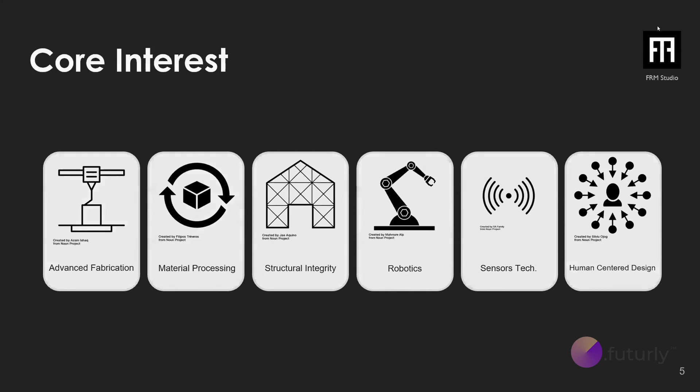A valid question at this point is, why did we come together, and what are we trying to do? So first, FRM Studio did analyze that there is a gap in the design to fabrication process. There is a gap in the design to production process. And this gap is basically a lot of designers fall behind when it comes to materializing and being able to actually visualize and see what their product would look like.

Another one that is important is Miami has an appetite for high-end products. There is a big art scene over here. And what we really wanted to do is to have a creative house in Miami that can do design to fabrication. Now, pushing this a notch further, we figured integrating sensor technology with fabrication is at the core of what we would like to do. And Miami does not have a one-stop shop, or it may, but it does not have that much competition that can execute from design, fabrication, and integrate technology into it.

Most important, which is the fourth point, is we wanted a space that is ours, where we can come in, we have our own machines, we have our own tools, we're designers. So we wanted to fuel our passion and interest to do proto-architecture.

So what do we plan on doing? We intend to design and produce architectural elements. Those are going to be fueled by science, advanced fabrication, and sensor technology. We want to build furniture products, building systems, that can be cladding systems, that can be, you name it, an art installation.

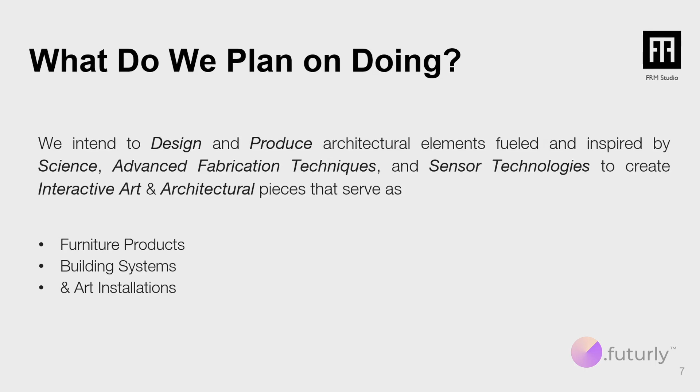So a valid question also at this point is, what is design versus design to fabrication? If someone approached me with this question, I'd say, if what you mean by design is solving functions and laying out a floor plan, yes, design to fabrication is totally different. I will be answering design to fabrication in the project that I'll be covering soon.

So what do we do, or how do we do it? Actually, not what do we do, how do we do it? This is really important. And those 7 points that I have over here, I'm going to be covering also in the project that I will be showing. But the first thing that we do when a client approaches us is we assess. Is this a good opportunity? Does it line up with our company's vision? How do we go about it?

And if we figure out that, yes, it does line up with the company vision, and we would like to take on this project, we try to offer a solution rather than offering a service. So we try to define what is our client's main pain point, what do they need, and how can we best serve them, rather than just taking on a commission for monetary purpose or whatever other purposes there is.

From there, we ideate. That's where we know what the client's need is. We try to combine this with our inspiration. From there, we conceptualize. So we start sketching, diagramming, putting whatever we think is a good step to move towards a digital model. Once we do so, we start prototyping. We prototype with paper. We prototype with wood. We prototype with 3D printing, you name it. We always like to see it. And the sooner we see the product that we're going for, the faster we can troubleshoot and the more robust this product comes out.

Key questions that I would like to answer as I'm showing these projects: what are design constraints? How to define a project's design constraints? How do I leverage design constraints to develop a product? And then how do design constraints become a design intent? Here we see Canopy, and I'm going to try to go over the 7 points that I mentioned earlier.

So the ask was a sculptural piece for a backyard. The sculpture can be enjoyed with friends and family. Scale was requested to be a minimum of 12 feet high. That's 4 meters high, more or less. Placement is for the outdoors. Lights and sensors are a must. That's literally what the client wanted.

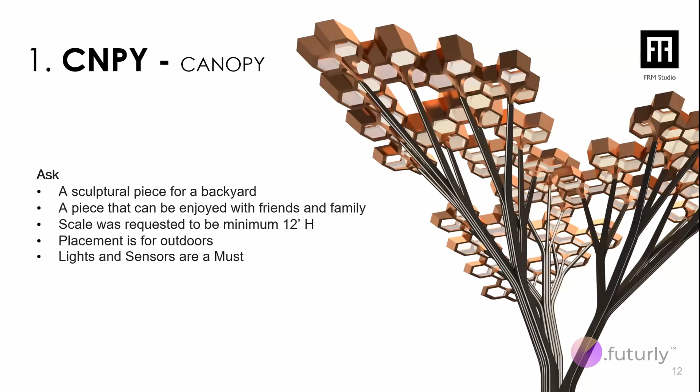So for us, when someone says, hey, I want something for outdoors in Miami, that means Miami's weather is hot and humid. Then I need to start thinking, if I use steel, would this work? Do I need to finish the steel with something special? Is it going to rust after 2 years of operation? Also, Miami is well known for hurricanes. Miami hurricanes are often destructive, and that's a big component because it will big time impact the structure that we will be making.

12 feet high, that may require a foundation. It would require engineered connections. It would also have to be modular. Interactivity and light. In that project, we had 250 meters of continuous LED strips. That's 833 feet. So each LED strip would require a power supply. It would also require encasement, since this is going to be outdoors. So if I'm saying 833 feet, that would add up to a minimum.

And if I was to say like single LED strips, that would be around 100 LED strips maybe, or maybe less, I don't know, but that's a lot. And the actual encasement that we needed would cover the whole foundation of the sculpture itself. Last one is when someone says 5 years, there is a maintenance plan that is needed. There is a lot of logistics that are needed.

As I move forward, I also want to disclose that most of what you see here is not my sole work. It's not my own intellectual property. A lot of people have been in and out in these projects, not only the FRM team, but that extends to a lot of people from FIU. We did a lot of these projects at FIU.

And I would want to extend actually a big thank you to Samuel Morris, Matteo Stancari. They worked heavily on this project. Julian Ramirez had always been helping us. I mean, some names that I always think of, and they have been amazing help and actually collaborators through our journey up until we started building FRM, and the collaboration continues.

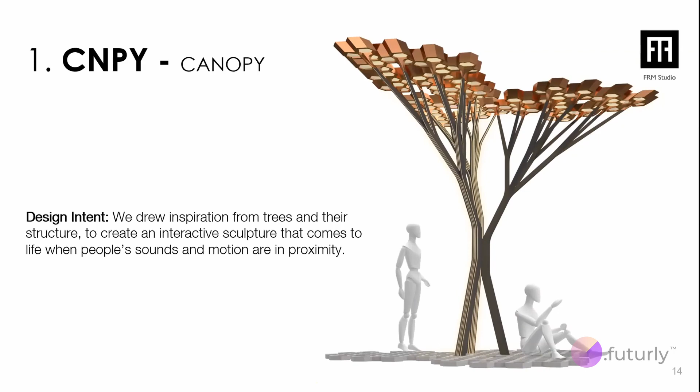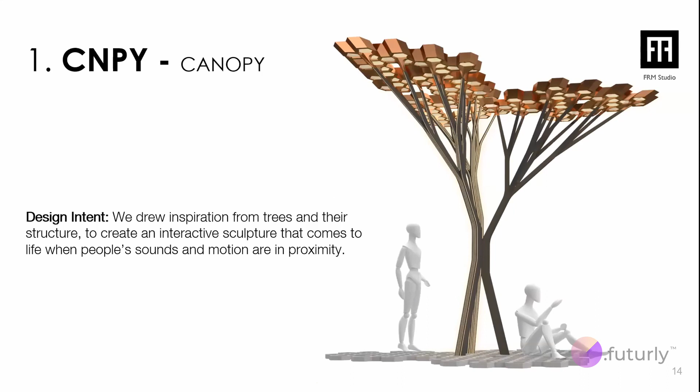In this project, the design intent was very simple. And as I said earlier, this is design to fabrication. So I'm gonna focus a lot less about the design inspiration and the philosophy. I'm gonna focus a lot more on how did we make it happen. So we drew inspiration from trees, their structures. That's how the design came about. If Elmer was here, he would go for a good 30 minutes just explaining his vision while designing this. And what we wanted to do is whenever someone approaches the sculpture, it comes to life.

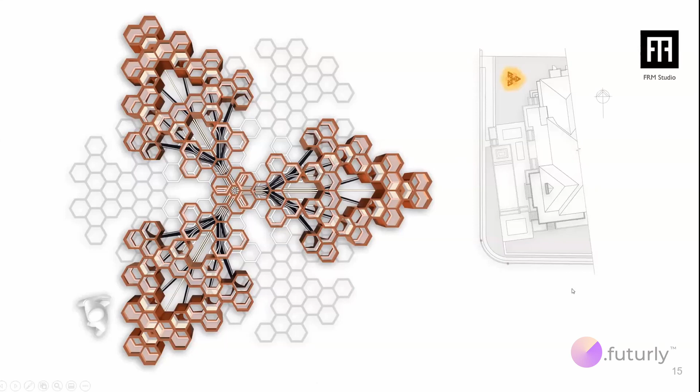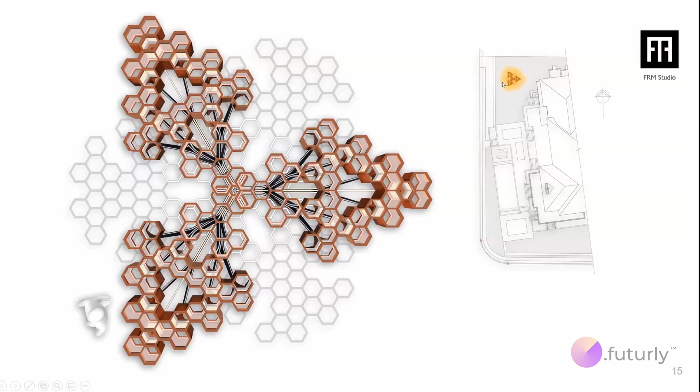This is what it looks like on a floor plan. The client's house is on the right side, if you guys can see my cursor. On the left side, this was all surrounded by water. I should have updated this drawing, my bad. And then on the opposing side, we had a national park. The main trick was to create this dialogue between a man-made tree-like sculpture and the actual real one.

Now, if you look at this drawing over here, we have a concrete pad at the base, sensors and LEDs, they run as channels. Those are in yellow. We have corten, branch and limbs. Corten is a type of steel. So all the trunk, branches and limbs, they were all projected to be corten. And the foliage at the top is copper.

Now, again, my responsibility as someone directing or managing this project, when a client says, I want a copper foliage or I want it to look like copper, the first thing that I would start thinking of is budget. Copper is a lot more expensive than if we were to use maybe anodized aluminum. It would give the same exact effect if the intent is to actually get this polished finish. Copper has much more interesting characteristics than just aluminum. It could age, which actually would give this sculpture a much more interesting look.

But again, I'm only pointing this out as this is literally what was happening to us. As we were moving forward in this project, every word that the client voiced out, it meant an input towards what we can do and what we can offer.

Now, the key question is, how do we build this? And the answer is not to build a 3D model or to actually just maybe 3D print a 3D model. The answer is we got to pin down exactly what did we want to see or what did we want to test from structure, cladding, LEDs, sensors, and power supply. Those were crucial for what we needed.

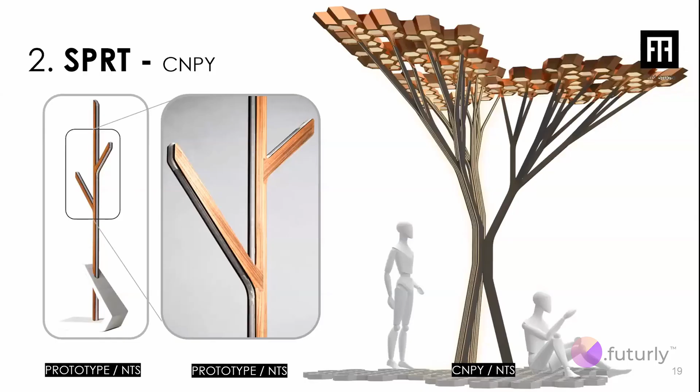So if you look at the tree on the right side, this is Canopy. On the left side, this is Sprout. That's the second project that I would like to present. And it's basically the prototype for Canopy. What you see here is a simple branching system. The LEDs would wrap all around. So it's very similar mechanism.

It's just the intent on the left side was to give our client a piece, a product that he can keep at home and he can be happy about. So our prototype was not just for testing purposes. It was for testing plus to give our client a product that he can show off. What we did is we added a resin base to the bottom so we can encase all the hardware. This piece that you guys are looking at was interactive. It was motion active and sound reactive.

The components, as you can see on the left side: we have flip milled teak wood, extruded aluminum, that was the structure at the center, LED diffuser that goes on the sides, LED channel, so the LED strip that goes in between can actually be sandwiched.

Now, this system that you see in front of you was, again, designed by the team, but the main intent here was how can we build something fairly quick, but at the same time, we're not designing and making everything. So what is it that I can get off the shelf that can help my purpose, but at the same time, where do I really need to act as a designer?

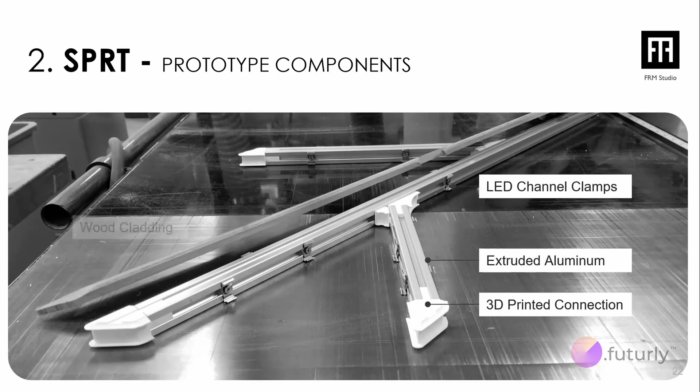So as you can see in this one, the 3D printed connections were at the corners, and it's what connected the extruded aluminum together. That helped us create the branching effect. This was actually designed in-house, which I will show in the next slide. We had the extruded aluminum at the core of what we did, LED channel clamps, and the wood cladding. This is a picture of the 3D print, but now let's go back a little bit.

I mentioned that this is for the outdoors. If we're prototyping, we want to be as close as we can to what the final product is going to be. So those connections were not printed out of PLA. They were actually printed with a special filament that was best suitable based on our own research for Miami. So again, humid and hot.

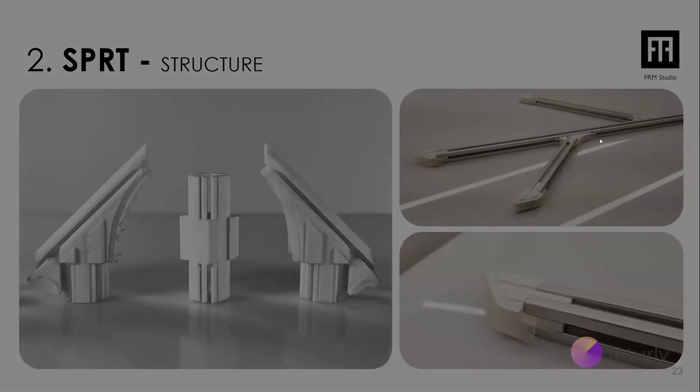This is ASA. It's very close to ABS, but it can take a lot more heat, and it doesn't get ruined with humidity. And again, what we did here was not only to connect the extruded aluminum, but also to create opportunity for the LED strip at the corners to actually wrap around. A video on the left side showing how the cladding system goes on top of the extruded aluminum.

But now what I really want to point out in this whole project: when you have a project that requires CNC milling, you have 3D printing, you have pieces from off the shelf that you want to deploy, that's a lot of tolerances that you need to take into consideration. When I 3D print, a surface does not have a thickness. So I need to consider, when I'm depositing plastic that's going to add thickness, what would that look like when I want to put my pieces together?

Same for the wood cladding. When I'm CNC milling, there is the actual router bit. Its radius has an effect on how these two pieces are going to come together. And honestly, again, grateful and thankful to all the team who actually put effort into this. That was a lot of knowledge and know-how compiled over a lot of other projects to be able to execute on this.

Now, LEDs and sensors. I did mention earlier that the base was encasing the hardware. So we see the wood cladding, the LED channel, as I mentioned, it wraps all around, motion sensor and audio sensor. To see it in action, this is what it looked like. It did not flare down much light. You can see in this one, the cladding is still spaced out. So this was just put on top of it so we can visualize what this would look like.

A really important piece of knowledge that I would like to share is going back to tolerances. We did use a caliper. A caliper was integral to measuring anything and everything that we did. And the main reason is the more precise you are, the better your product is going to come out. And also the more understanding you have of the machines and their processes, and of the actual materials, the better your product is going to come out.

And that did not solve it. You can hear now? Oh, you guys can hear it? Perfect.

Well, this is it in action, and that kind of wraps up the first two projects. That takes me to the third project that we worked on. And in this one, there is also a learning curve. This one we call bench. And basically, the main question that we have here is, how important is it to prototype in the design to production or design to fabrication process? Well, we did mention earlier that it is extremely important, but I'll try to hit on more as we move forward.

The ask was a multi-purpose bench for an event. The event took place at an indoor gallery. They needed a circulation divider. The gallery had one point of entry. We were given 2 weeks to finish this, and the budget was almost non-existent.

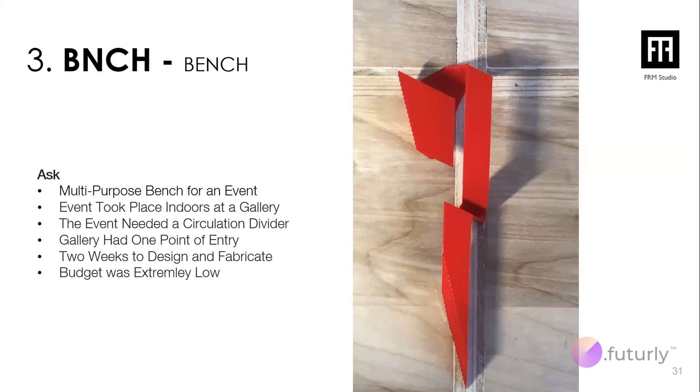Did it line up with what we wanted to do? Yes, it did line up. That's why we did it. So the assessment phase, I'm going to take this out. Most of the projects that I'm showing, we did want to do them. That's why we did. So the design constraints when I see something like this is material dimensions and thickness, which I will actually explain more in a few slides. The final product movability and transportation, that's also something to consider.

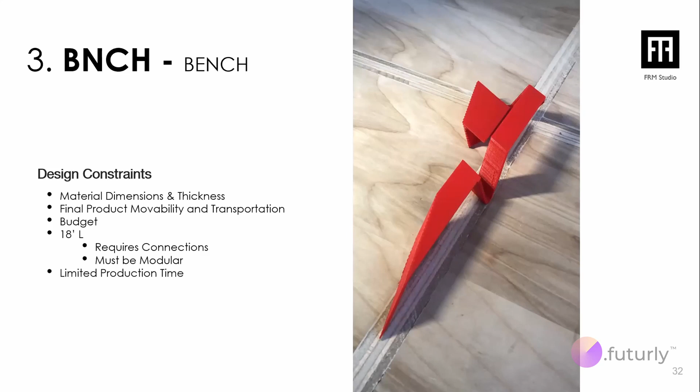This is 18 feet, that's 6 meters more or less, which means it's going to require connections and it has to be modular to a certain extent. The biggest constraint is probably the limited production time. This whole project legitimately was produced in 5 days. Ada Diaz on the right side, big thanks to Ada for helping on this project.

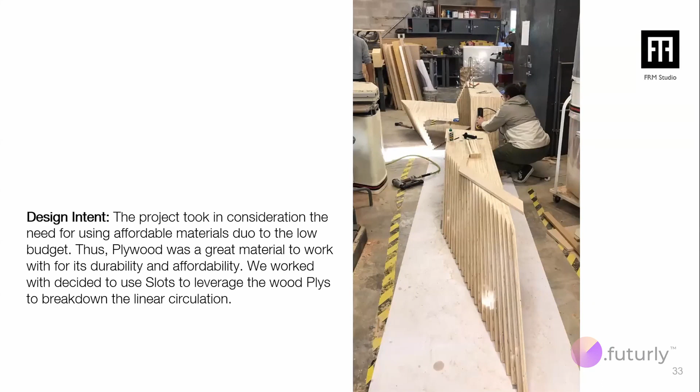The intent was to take into consideration affordable materials because of the budget. We decided to use plywood and then piggyback on the plywood idea that it's made out of plies to create this circulation divider. So literally people would come in, as we were watching this picture, and they would start splitting so they can engage with the gallery's different activities that were taking place.

Some pictures, again, going back to, I don't know if you guys can see this, but is this how we prototype? So yes and no. It's good so we can see what the surface would look like, but no, this doesn't give me enough data on how to construct the 18-foot bench. Some pictures so you guys can get a flavor of how it can be deployed or how it can be used.

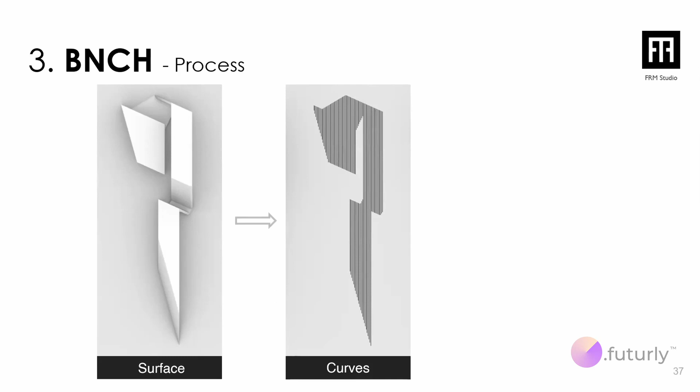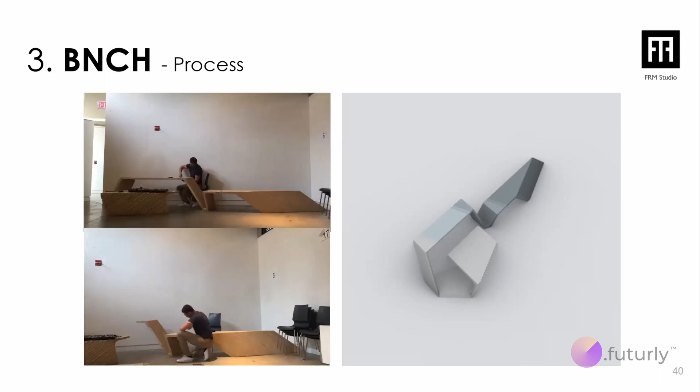And what this actually means is our bench was made out of 5 main pieces. So 1, 2, 3, 4, and 5. I think this animation will show it a lot better. This is how it will go apart. That's me on the left side. But this is literally when I disassembled the bench so I can move it somewhere else out of the same gallery that I mentioned. I'm just gonna wait for the top left video so you guys can see how it would come down. I think it took me around 2 hours to break it apart.

So when I see something like this and I know I want to make it modular, a big thing to consider is, how am I going to be making this? We knew we wanted a CNC mill. So when I want a CNC, my CNC bed size is the biggest constraint that I have. I cannot go more than 8 feet, which is 96 inches. So 8 feet is more or less 2.5 meters, I believe, 240 centimeters. So we knew that the biggest piece we have cannot exceed 8 feet.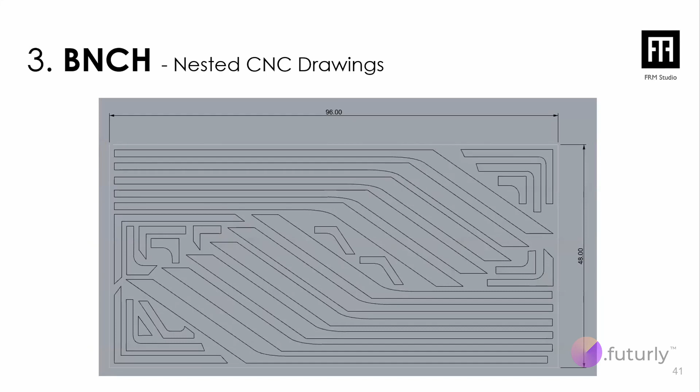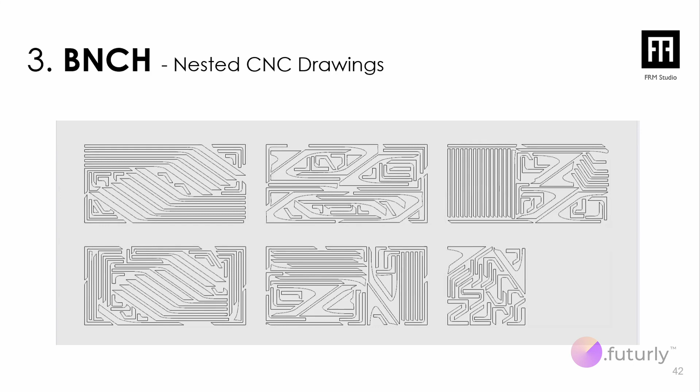So if I go back one slide, this piece was the longest we had. We could not exceed the 8 feet. This is what one board looked like. This project, we had to use 6 different ones. So what we did here is we nested the drawings using a plugin, and that was an easy, quick solution, so we can get the most optimized layout of our pieces on a CNC bed. Same picture in action. Some of the fabrication pictures, you can see the connections on the right side.

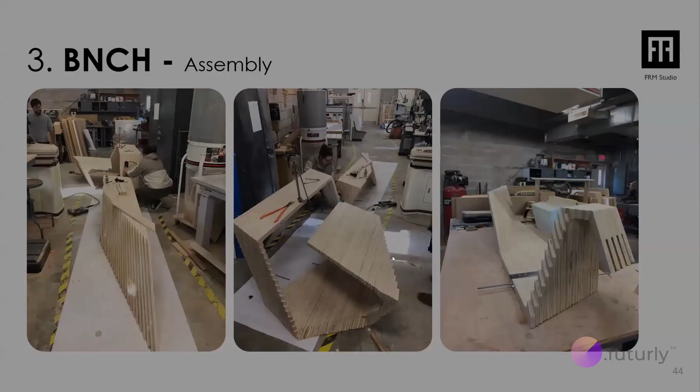And that takes us to my last project that I would like to share with you guys. This one is basically a project within 6 projects. I was asked to actually set up an inauguration event. The main intent of that inauguration event for the Robotics and Digital Fabrication Lab is to show off different robotic arm operations. The lab got a grant, so it got funded so they can get robots. And we wanted to show this off to the architecture community, so this can attract more collaboration and business opportunities to the lab.

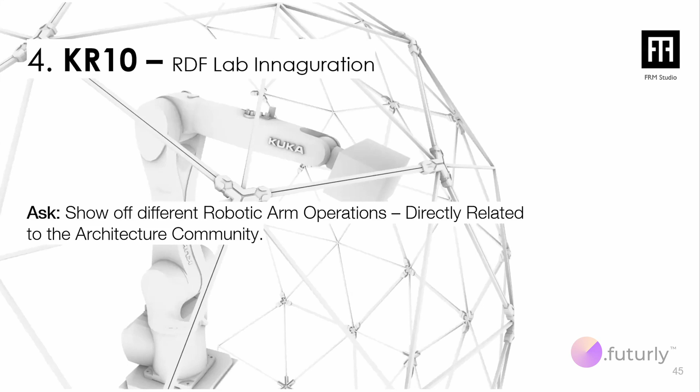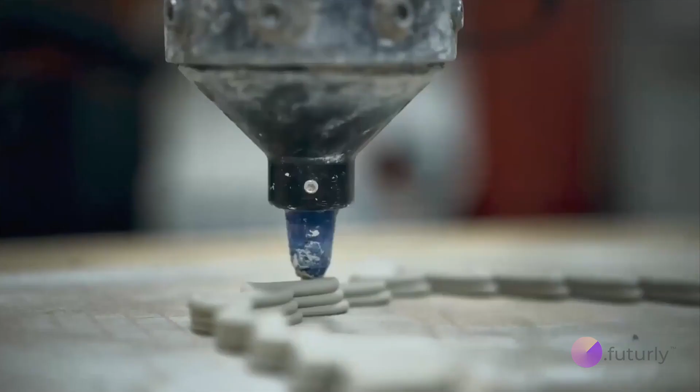This is a video that shows what the event looked like. It shows also some of the projects. This will be the one that I'm going to talk about soon. So from a pick and place demonstration to drum pots, clay 3D printing, the actual ribbon cutting happened with the scissors that were mounted on the KR10 robot.

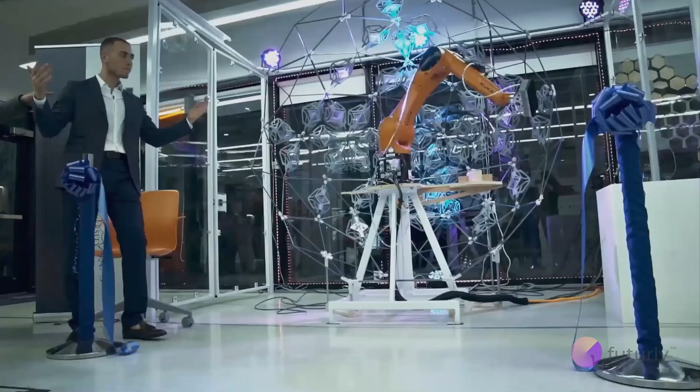So dramatic, I know. A lot of pick and place we did.

event. But then once we started thinking about it more, we're like, okay, it will be cool to have tables made out of Muqarnas geometry, but how much does it really show off what the robot can do? Honestly, the answer was, it's nice, but it's not going to show off what the robot can do. This robot can move in any direction almost, and it can move 2 meters per second and is extremely highly accurate. So this is an Agilus KR10. They're high precision and high speed.

The learning curve in this one is the machine precision versus the error that we introduce as humans. We go back to the KUKA manual and we start wanting to map out this robot. And the intent was, if we can map out the work cell, we can demonstrate a pick and place exercise by having the robot pick a unit and place it in a direction that is literally constantly showing off how its work cell operates, or the extent of the work cell. So that would show off reachability, it would show off the speed, and it would show off the accuracy.

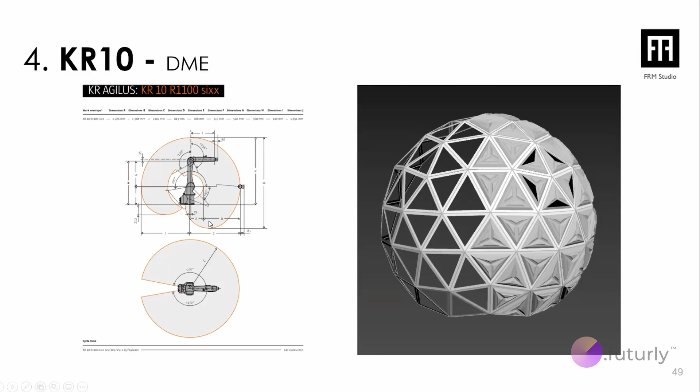On the right side, actually, over here, this was the first try of us mapping what the work cell looks like. And when I say a work cell, this is what I'm referring to, this outline at the top. So from there, we figured that using a geodesic dome would be wise. And the main reason why we decided on a geodesic dome is because it's the most structural. It's made out of pentagons and hexagons. So we knew exactly how to break it down into modules, so we don't fall into the same trap with the bench as having to move a giant piece all at once. So we knew we wanted to be modular.

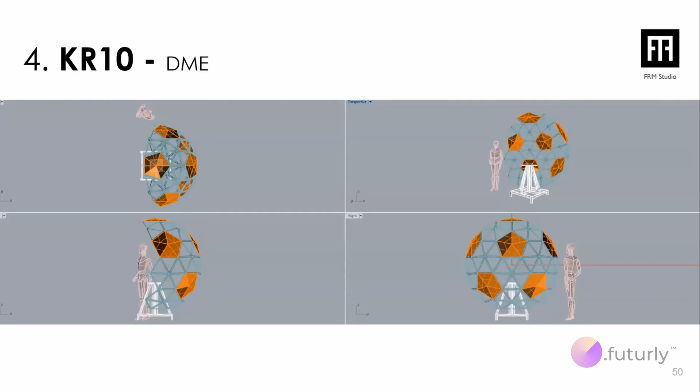He's like, oops, no. We only had, I think, a week before the event, and we did not have enough time to replace it and build a new jig. Basically what happened is whenever we tried to weld on top of it, it was wood, so it was catching fire. The fire was going up and it would make bubbles. Those bubbles were actually messing up the weld, which I will show in a little bit. It was not too bad, but we learned that moving forward, we will not make our jigs out of wood if our intent is to weld.

Now, those are connectors that actually help us put all the pieces together. So when we had the hexagons and the pentagons, those connectors that you see over here are what really clamp the whole thing together. You can see on the left side also the H and the P. The H is for hexagon, the P is for pentagon. So now whenever we want to put the whole thing together, we know how the connection works, which I actually have one over here. And I do want to show you guys what it looks like. Oops. This is it in action.

You can see on the right side, the zip tie. Whenever you zip tie it, it starts coming together. And on the left side, this was another connection that we developed, so it can absorb all the weight coming down.

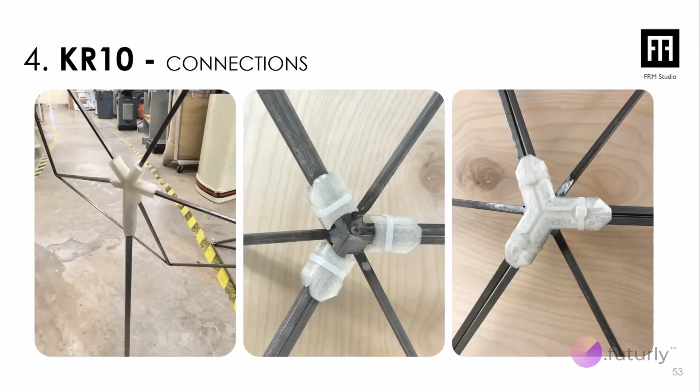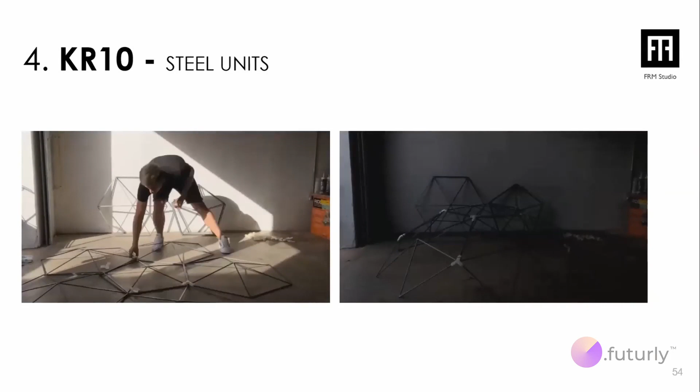That's how hexagons and pentagons would actually come together using the same connections and zip ties. And as I mentioned, those were made out of steel. So whenever you're using steel in Miami, we had to somehow finish this. So we used car paint. And this is George Maripa on the left side, actually painting those units.

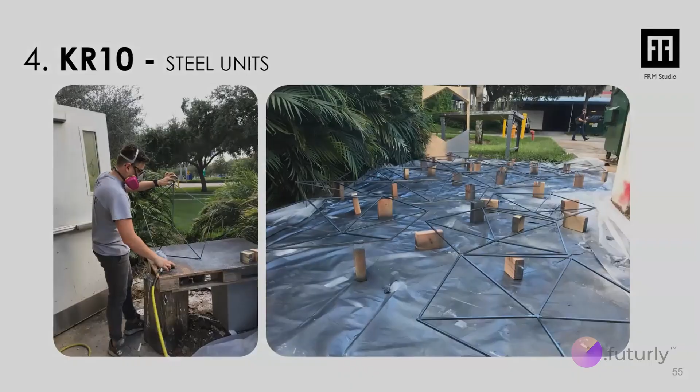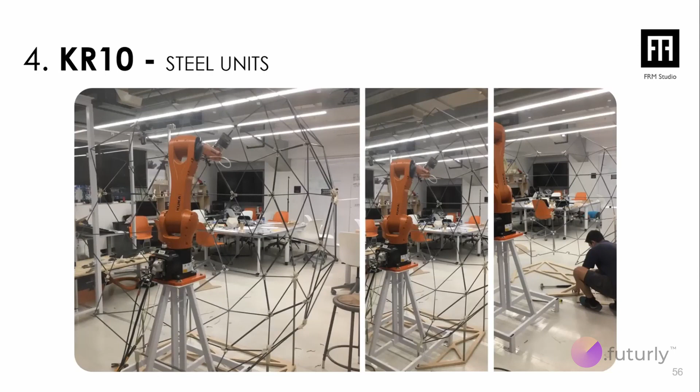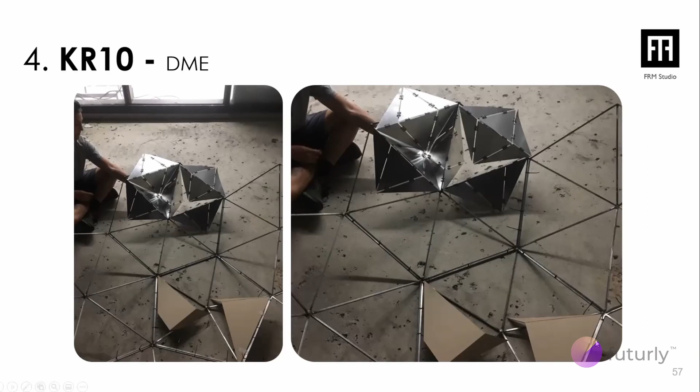Now, we figured out the dome. We figured out how to connect everything together. Our next move was, what would we be placing on top of this dome? What type of units are we going to be making? So we go back again, like I said earlier, we prototype with whatever we see in front of us. We had some chipboard, and those are the ones at the bottom. And we started placing different modules to see what this would look like.

Somehow, we landed on making this unit. So we spent a day just designing a unit that we wanted to deploy. We knew we had a steel dome. So we were like, okay, if the robot's going to pick up a unit, how would it place it on the dome? How is this going to clamp on it? So we made openings at the center, and those openings were where we placed magnets.

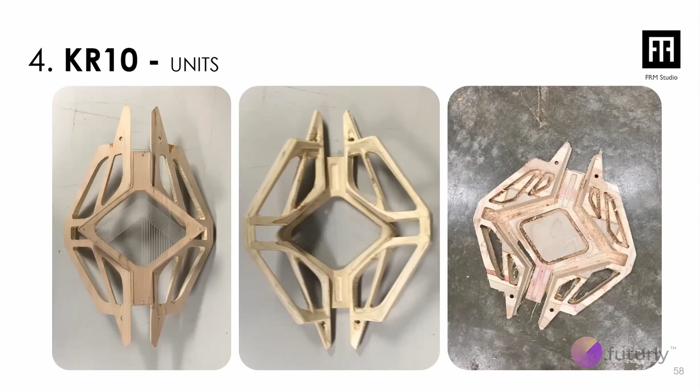Now, another learning curve in this one: the unit that you see here in the center and at the left side took 1 hour, 40 minutes of CNC mill time. We needed 50 of these, and we were at crunch time. Do you think I was going to let this happen? I was like, no, this is not going to happen. We have to shrink this time back. We have to figure out a way to optimize this geometry so we can CNC mill at a much faster pace. We were able, I believe, to optimize the CNC milling time to 40 minutes per unit.

Those are the updated units. Big thanks to Nadi in this video, Carl. A bunch of amazing people, honestly, 30 people joined in just to help us put on this whole inauguration event.

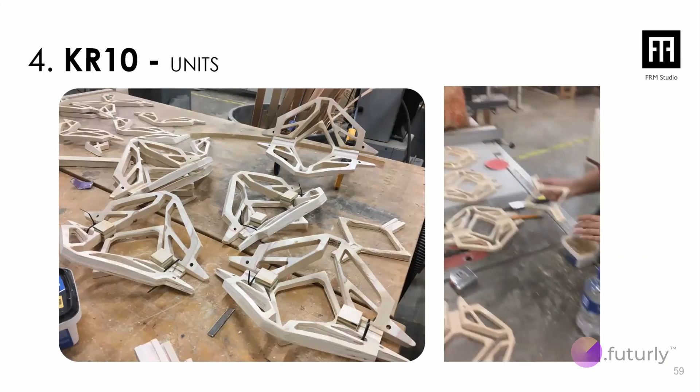I do have a unit actually in front of me, if you guys can see it. And those are the magnets that I mentioned. And whenever there is steel, if we were to drop this in front of the dome, it would just clamp directly on it. There is a video that I will show in a little bit.

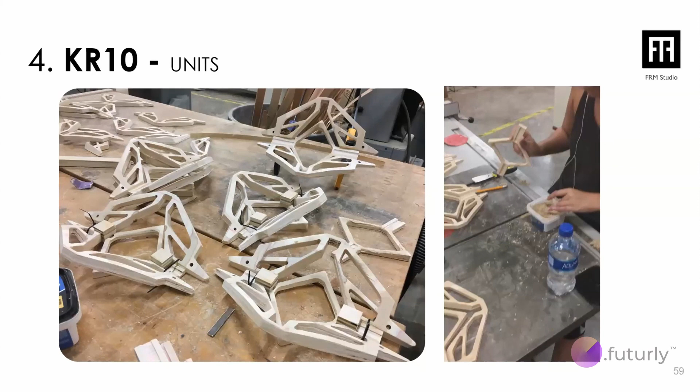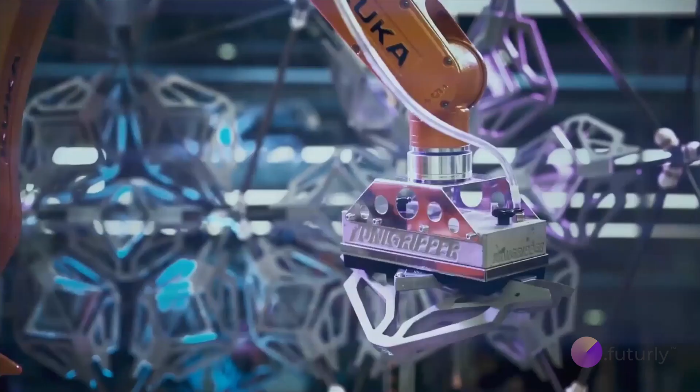But now, here is the catch. We had the dome, we had the connectors, we had the units. Everything is working out perfectly. We go to do the simulation, it also runs perfectly. In my mind, this is what's going to happen. It's going to work perfectly. It's going to be so dramatic, so beautiful. But then, life is too real. It did not work that much.

What ended up really happening is, and if you guys can see over here, the unit, the piece, really had to drop at the center of the rod. The tolerance we had was this much. So if the robot was to be off, it could only be off less than 1/4 of an inch up or down. 1/4 of an inch is, I honestly don't know, probably less than half a centimeter. So we did not have much tolerance.

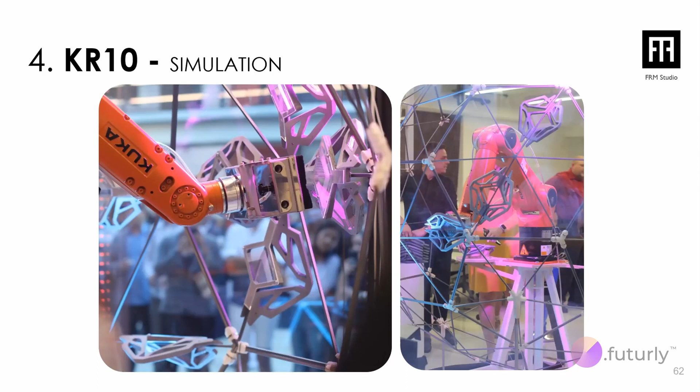Again, in our mind, we made the geodesic dome as accurate as we could. Those connectors were 3D printed also as accurate as we could. There is no reason for our simulation to be off. Now, this is the first time we ran the simulation. The robot seemed to function perfectly fine. It was picking up the units and placing them virtually. But then, whenever we actually had the dome in front of the robot, you can see the gripper, and this is the rod. And it's off. One time it's tilted, another time it's spaced up.

What we realized, actually I'll go back to this slide, is that the steel units and the units that were dropping on top of it were picking up a lot of weight that was making the dome deflect. And whenever the dome deflected, we lost all the accuracy that this robot can actually bring in. And that's, again, the learning curve, that we as human beings, in our own fabrication, unintentionally introduced a big error that was not planned for.

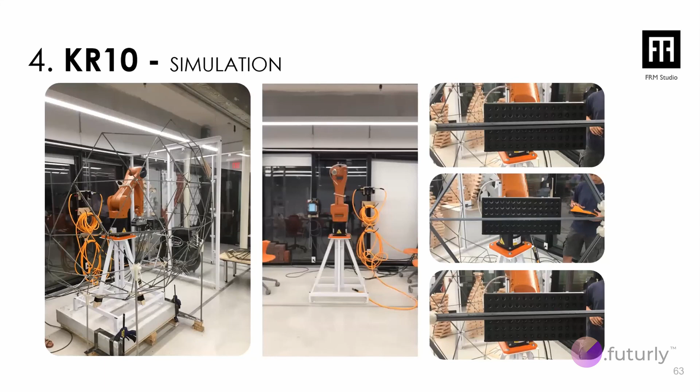Now, how do we recover this at crunch time? Well, we developed a quick end effector that really helped us go back to all the intersecting points so we could remeasure and update our script.

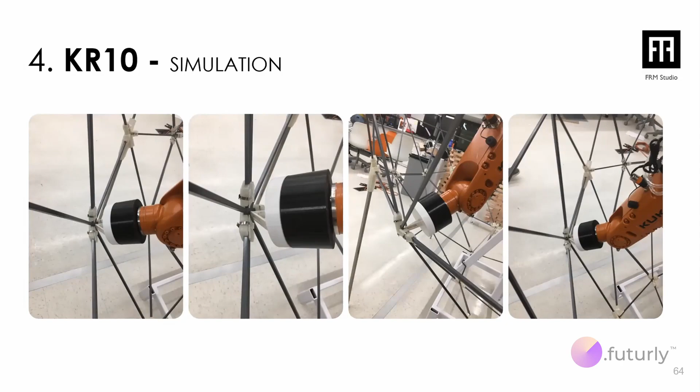The only thing we did not like in this simulation was the fact that the dome was moving every time a unit gets dropped. So we had to figure out a way around this, but to be honest, we had no time. Moving forward, if I was to do a project like this again, I think we would make it much heavier at the bottom, a lot lighter at the top, so that we never fall into the same trap. But like I said, you live, you learn.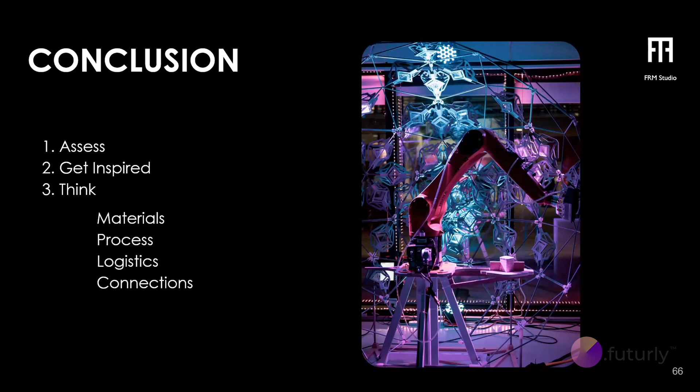So the conclusion from the project that I showed: make sure you always assess an opportunity that comes your way. Don't take it lightly. Try to offer a legitimate solution, not just a service. You can do a service, I'm not opposed to this, but make sure you're offering solutions to your clients. That's how you build a clientele. Get inspired and think. Think materials, think process, think logistics, and think connections. Don't underestimate any of these.

Materials are extremely integral to what you're going to be making, just as much as what process would I be using: is it going to be 3D printed, is it going to be CNC milled? Logistics as in, if I was to take this bench, do I take it in one piece? Do I break it apart? And connections as in, what would the structure look like?

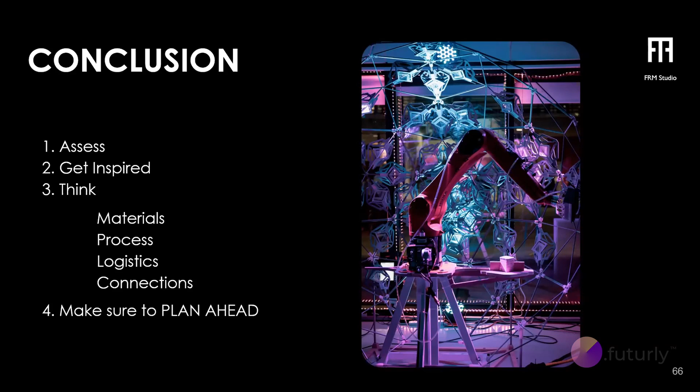And last, make sure to plan ahead. No planning, nothing is going to happen. I honestly think the main reason why we've been doing what we've been doing is because we plan, we assess, and we try as much as we can to be as genuine as we can to our clients.

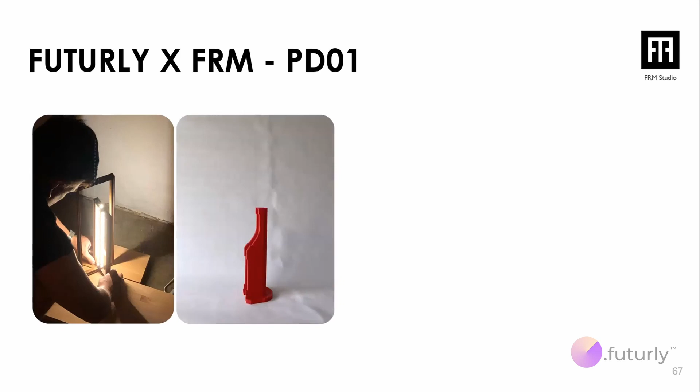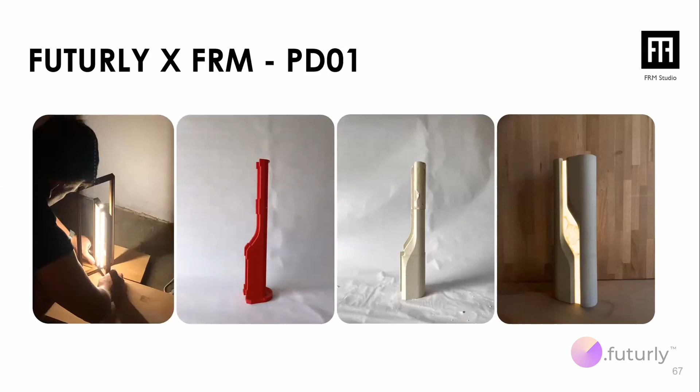Well, FRM Studio recently developed this light piece. It's called Monolith, and we are launching a product design course with the Futurly team that is focused on the design to fabrication ideology and how we go about it. So what we would like to share with you guys is our own journey developing this product. I'm going to be showing some units that we made in-house, from the first prototype that was so crappy, that was literally in 6 different pieces, and how much we learned from doing this, to maybe the actual piece that is functional, that works,

to even 3D printing the actual piece and learning from the material that we use, the type of connections we would need to develop in order for this to happen, developing jigs and understanding, okay, if I wanted to bend or create something that is a fascia for my product, what would that look like? How would that work? What type of jig would I be making? We even CNC milled these pieces, which you can see in here. So that's one of the sides of the casing.

And honestly, the one that I'm always excited about is our first prototype. And this literally happened. I think we developed this in a matter of 12 hours from idea to having this piece that you guys can see in front of me.

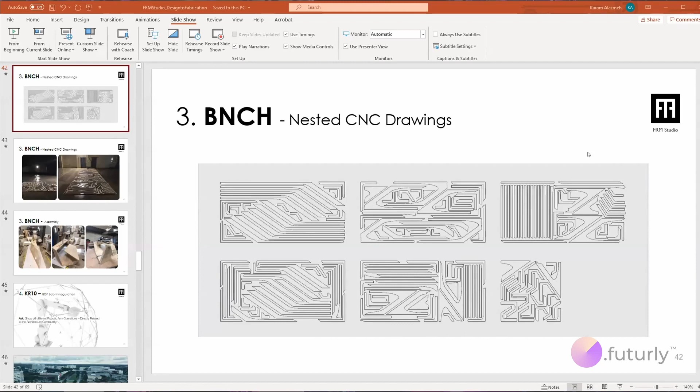What type of filaments would be needed to achieve optimal results during the workshop? That's a good question. In what we're going to be teaching, we're going to be talking about having a light source, right? So that emits heat to a certain extent. We're going to be showing you ways around the actual heat that gets created. We are prototyping using PLA, but we're not going to be advising you to only use PLA. We're going to give different options.

We're going to show you different ways of casing it with PLA, but at the center you're going to have another channel that would make you avoid the heat problem. So we're going to prototype with PLA, but ABS is always an option, which will work slightly better since it can take more heat. I'm going to show you a defect that happened here. You can see there, and on this side. This happened because I left this piece in my car for a couple hours in Miami. I hope this answered.

I think also, Vamsi, we had a question from last time. Someone was asking about software related to design to fabrication. As you can see from my screenshots, we're super heavy on Rhino. Rhino and Grasshopper are great. Grasshopper as a tool, but I wouldn't say we're solely focused on Grasshopper or computational design. Rhino as a platform is always good because you can easily go back and forth with different platforms or software. Plus, it can be extremely precise, so we're extremely comfortable using Rhino solely.

Guys, thank you. If somebody wants to unmute and ask a question live, just raise your hand or write in the chat and we'll give you access. Yes. I mean, come on, you guys can have some questions. You don't want to just keep hearing me talk. You know, it's a talk. How to send an emoji? I honestly cannot answer this, but it is a valid question. Yeah, we will give you the access, SR.